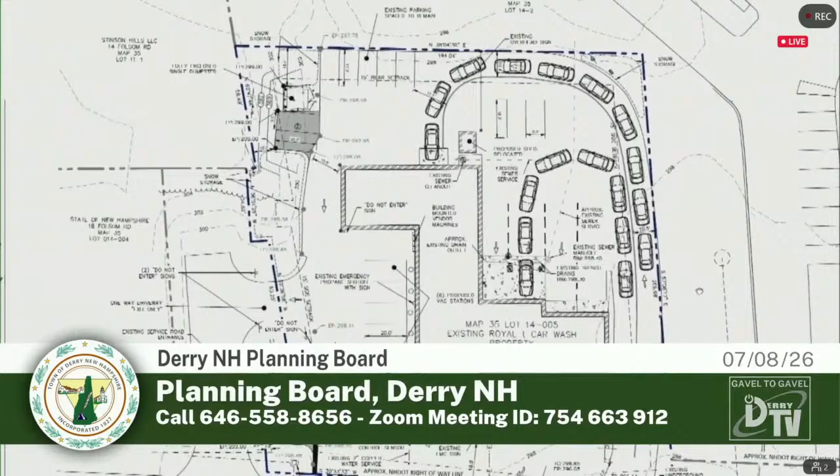Saved me. So I guess if we can pull up sheet 3C-200, I think that would be the best place to look. So as you can see, the right-of-way encroached on their property. The state purchased it from the owners. The building is now about 40 feet from the new right-of-way line.

We'll dive into the curbed island stuff because that'll be most of our conversation. They are proposing to move the vacuum stations, which were on the west side of the property, and now they're up against the buildings. You can see a note that says 6 proposed vac stations, as well as adding a parking space on each side of the propane tank.

That's the dark gray area on the southwest corner of the property, those 2 spaces right there. And then one more addition would be moving the dumpster pad to the northwest corner of the building with 2 spaces next to that as well.

They are increasing the amount of parking spaces. They wanted more parking spaces for employees and people drying off, because they're losing a big portion of the front of their property, which weren't really defined parking spaces, but now they're more defined.

As for that, we have the service road on the left side of the property, which was installed by the state, and that will be an exit only for vehicles that travel out of the wash bays, the long tunnel. They have to turn right from their perspective and exit out that exit. There's 4 bays on the right side, they're self-serve bays, and they will be allowed to exit to Folsom Road.

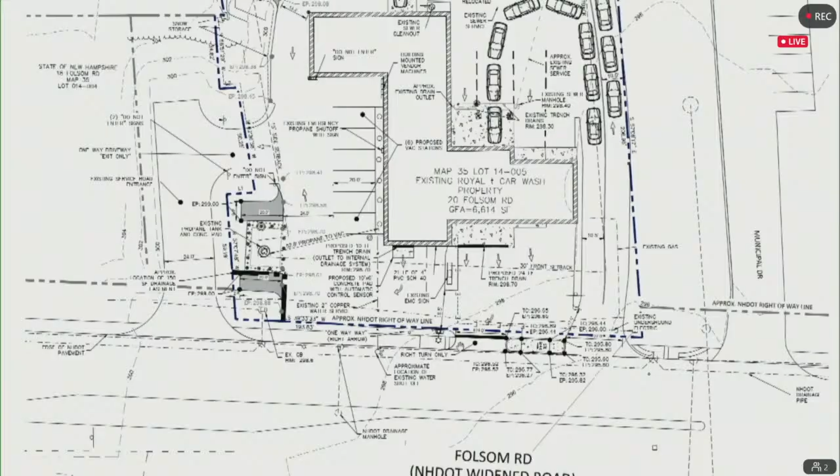So our solution was to provide paint, which would block off that same area and direct traffic towards the exit. It doesn't stop vehicles from entering and going to the propane, but that would be the only time they would cross in front of the building. Everything else goes behind the building, around, enter any of the bays that they wish to enter, and then exit out to the service road.

Other than that, I can take any questions to clarify anything. All right, do we have any questions starting off from members of the board? Seeing none, is there anyone in the audience or online who has questions or comments?

Seeing none rise at this time, okay, so back to the board. Anyone have any questions? No? All right, yep, Mr. Chase.

I have one. Can you clarify, so if somebody's coming in just for propane, where are they going to enter? They're going to enter from Folsom Road. Which entrance? The right side, that's the only entrance.

Okay, so there's enough, that 7-17 foot space is where they would cut across? Correct. Okay, so I want to state that this is 95% of their traffic is a car wash.

They are a car wash that also serves propane refill. There's maybe 8 or 9 cars a day that get propane, on average. Obviously weekends is a lot more heavy, weekdays are very minuscule compared to that. So we average about 9 or 10 vehicles that would cross in front.

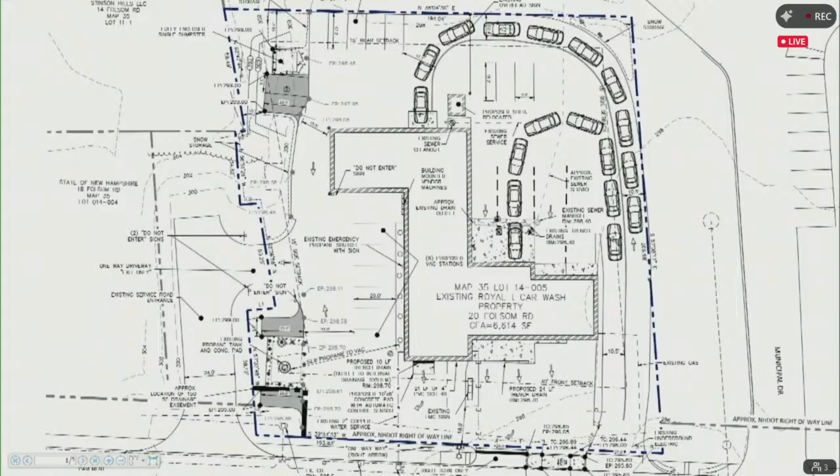In other words, there's no do not enter signage at the intersection of Folsom. No, we're not proposing that, because I believe there are future plans, but as of right now, for what this site has, our do not enter signs have to be right before our property. We don't know what they're doing with the service road when it gets turned over, but that has nothing to do with our property. All right, so the service road belongs to whom? The state?

I believe it's the state, yes. Okay, but it could be different in the future. It will be different in the future, once it's done, right? Because I'm looking at Stinson Hills in the back, that's an entryway. It's under the jurisdiction of the state, as he stated, to work in the right-of-way. And then all of the state right-of-way will revert to the town right-of-way when the project's complete.

Right, but we don't know when that complete date is, which is kind of the difficult aspect of trying to do the hard feature with the sidewalk, because the state is in contract with Weaver Brothers to do the work.

It's under jurisdiction of the state. And even when all of this work is complete in this phase, I don't believe the state will release jurisdiction until the final phase C is complete, which could be 5 to 7 years away.

Didn't I hear like 2038? Last I knew it was 2036. I don't think I'll be around for that. I don't know if it'll be that far along, but it is delayed a bit for the bike path tunnel. So we should not make any short-term plans there.

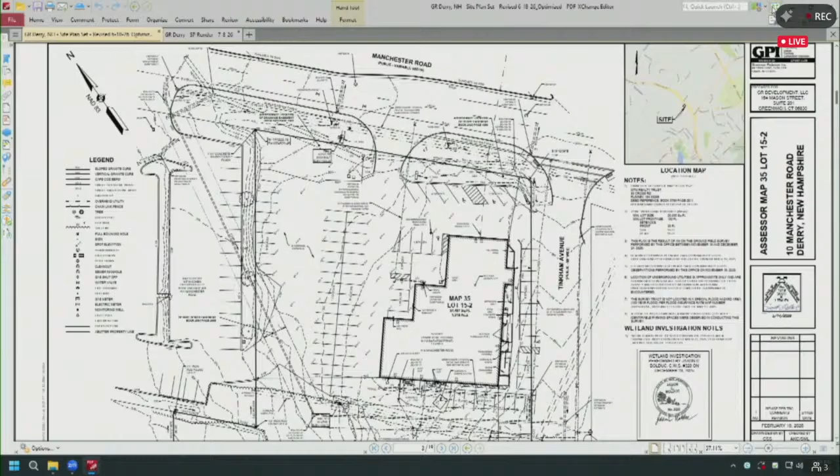So is this mic intermittent, or am I doing all right? I'm trying to talk right to it. All right, great. There's an existing multi-use building on the property now.

There's an existing right-in, right-out driveway along the center of the frontage of Manchester Road that will be closed off. Basically the entire frontage of Tinkham Ave is a wide open cut right now, if you will, with parking essentially encroaching into the town right-of-way on Tinkham. And so you'll see how all of that gets narrowed up, curbed off, and well-defined as a proposed curb cut.

There is an existing historical cross-connection between the existing uses on this subject property and the Applebee's, through a good amount of research there. We have identified that all rights associated with that are no longer in position, so those have all expired. To say, I guess, that neither party has contested that it continues to be used is our best summation as it relates to the historical aspect of that.

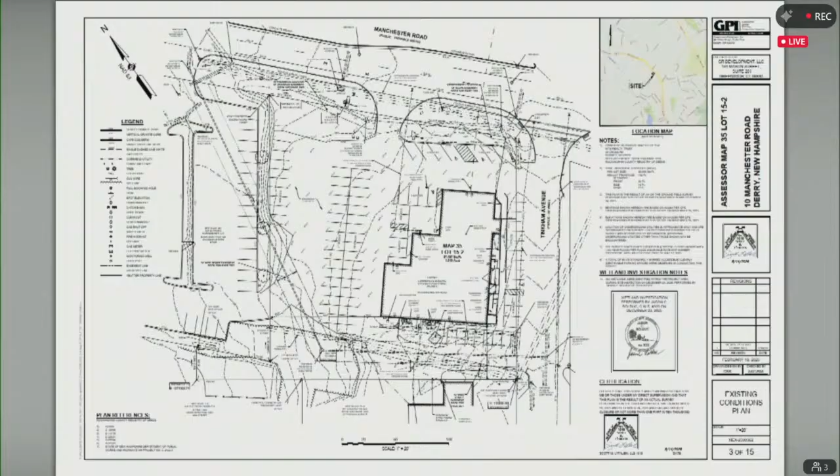I think that color site plan was great, if we can move to that. Thank you.

Yep, so you'll see here now that the proposal closes off the existing curb cut along Manchester Road. We provide a new pedestrian sidewalk connection there as well. The entire frontage along Tinkham now gets closed off to just provide a sole full access driveway the furthest distance down our Tinkham frontage, so moving that access point away from the intersection at the main road.

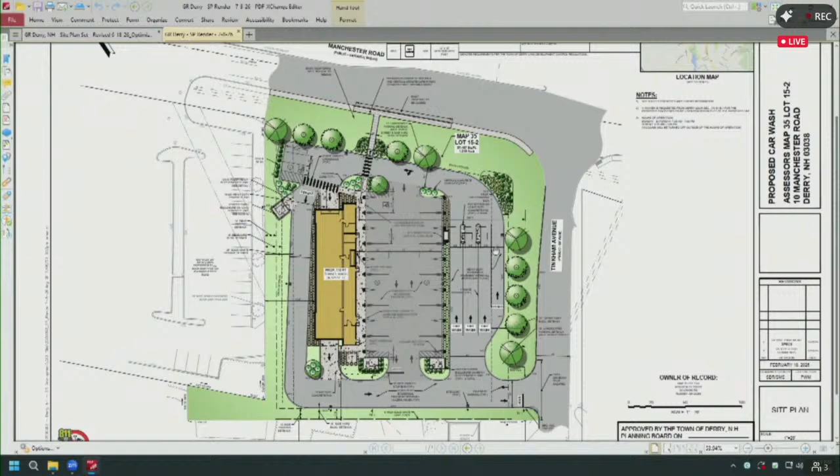So entering vehicles would come in if a customer is choosing to go through the tunnel wash. They would take a right and enter into one of the 3 queuing lanes for the automated pay lanes. So those are a first come, first serve scenario. So some folks might be on the pass program, at which it's going to scan your window tag and allow you through.

Other folks might be making a one-time transaction. Either way, whichever transaction comes first, the gates of each respective lane open, and that essentially meters the queue from the pay point forward, so that the 3 lanes condense to a single 18-foot wide one-way towards the entrance of the car wash.

Everything is circulating here in a counterclockwise motion. You'd come down through a single bay of a tunnel and exit at the bottom of the page. Again, all traffic continuing to make left-hand turns.

If a customer is choosing to make a stop at the vacuums, they could turn into the centrally located vac facilities, or they could proceed back out to Tinkham and be on their way.

Conversely, if a customer was coming in and wanted to use the vac facilities first, that is 2-way to allow that to happen. You'll see a 1-way arrow to the left of that stop bar, which is headed back towards the tunnel exit. So from a certain point, that bottom access way is noted with do-not-enters to facilitate that.

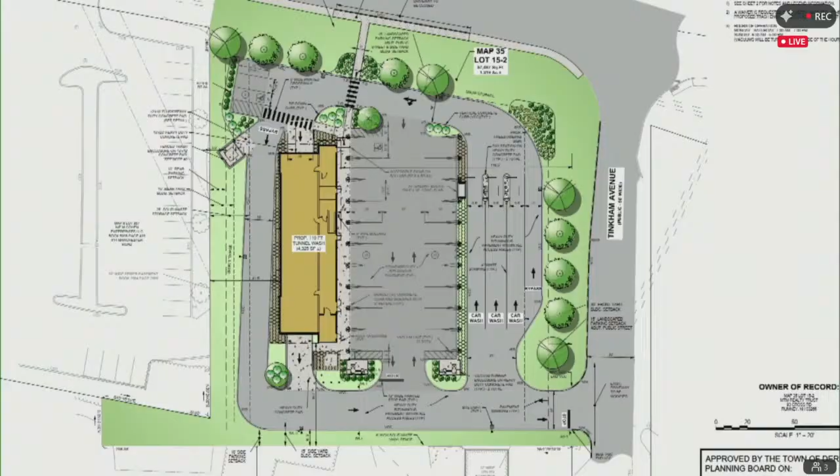Happy to answer questions. Oh, and I'm not an architect, but the architectural is at the end of the packet, and we're certainly happy to review that with you as well.

Questions from the board? Mr. O'Connor? Yeah, my question to you is, can you go over a little bit about the soil contamination in the wells that I'm assuming you took samples of?

Sure. So this site is across from the contamination site across Manchester Road, and it's down gradient of that contamination. There are wells on location for two purposes. One relates to that contaminated site across the street, and those wells are pretty close to the right-of-way along Manchester Road. There's 3 wells, so they're outside the limit of our work, and therefore will not disturb them.

Second contamination issue that historically has been presented was way back when this was a gas station. There's some record information of previous underground storage tanks. We couldn't locate them in the environmental site assessment that we did. But out of respect for that historical knowledge and concerns for the town, we've agreed to monitor the soils during construction. Typically you'd do that with a PID, a meter that measures the volatile organic content in the soil as you move it around.

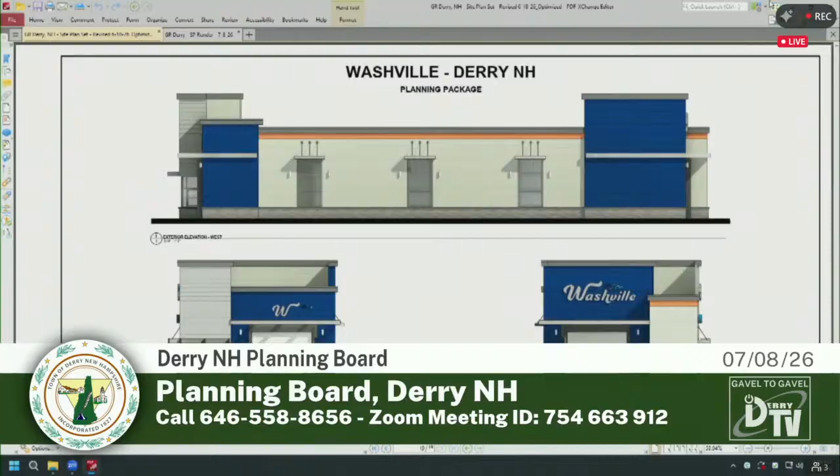This is generally our corporate look. It's been modified to respect the design criteria that Derry has. For instance, the articulation has been modified to break up the long wall. A tunnel by its nature is a long rectangle that has plenty of opportunity to be boring. And we added a lot of breaks along that wall. We've added canopies, defined the customer entrance, used various materials. So it is our modified corporate image to respect the design criteria as our architects interpreted it.

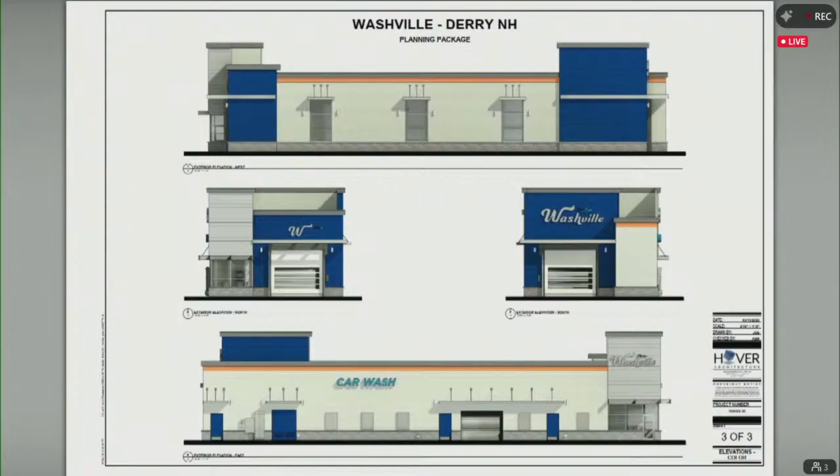Okay, any other questions? I have a question. You said fully staffed, 3 to 5 employees. I'm seeing 3 parking spaces, one of them being a handicap spot that you had stated would be employee parking. So I'm just wondering if parking will be adequate.

We have found that it is adequate. Again, we prefer not to put out more pavement than we need there. Some of those employees don't drive. Some are high school, some live locally, some commute with their friends. We have 28 of these facilities that we operate. In our experience, we don't need 3 to 5 parking spaces for our employees, and in an interest to reduce pavement, that's why we have proposed what we have. Okay.

All right, if there are no more questions, then maybe a motion to close the public hearing? So moved. Second. Moved by O'Connor, seconded by Pelletier to close the public hearing. Everyone in favor say aye. Aye. Public hearing is closed, so we will now move on to discussion of waivers.

Mr. Chair, would we like to take both these waivers together? Why don't you take them separately. All right. Mr. Chair, I move to grant a waiver from LDCR Section 170-67B1 to allow the dumpster to be located 5.5 feet from the north property line where 25 feet is required. After review of the waiver request, the board finds that specific circumstances relative to the plan or conditions of the land indicate that the waiver will properly carry out the spirit and intent of the regulations.